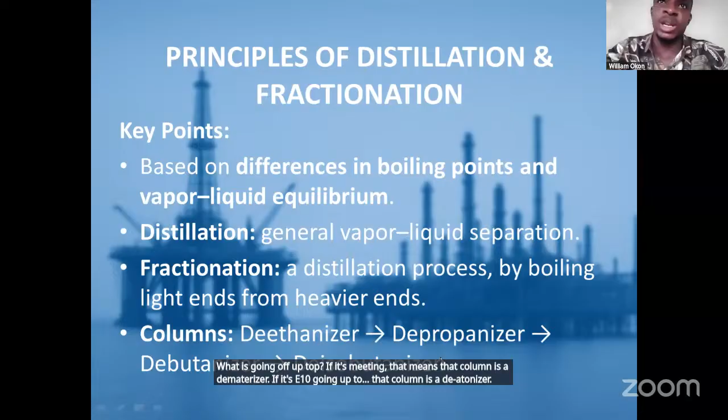Now, in fractionation, each fractionator is named for its overhead product. So if I am fractionating or distilling, separating a product, what is going off up top? If it's methane, that column is a demethanizer. If ethane is going up top, that column is a deethanizer. If propane is what is going up top, that column is a depropanizer. So it is named based on its overhead product.

So we're going to look at this simple process flow in NGL extraction. It starts with your gas preparation. NGL extraction processes have to start from feed gas preparation. So what does the feed gas preparation entail? It entails your gas treating and conditioning.

So if you look at my screen here, this is the gas treating and conditioning section I'm talking about. So when you talk about gas treating, what do we mean? Now, for a certain product, there is supposed to be a standard or specification for the allowable amounts of contaminants in your product. And this varies from one plant to another based on standards and customer requirements.

So what are we talking about? Let's say I am producing from a reservoir, I need to know my gas composition. I should know the amount of, say, ethane to propane ratio in my gas stream. I should also know, am I having sulfur in this gas stream? Am I producing sulfur as well? Is mercury part of this? How much water vapor content do I have in this gas stream? Now that would determine my gas treating and gas conditioning process.

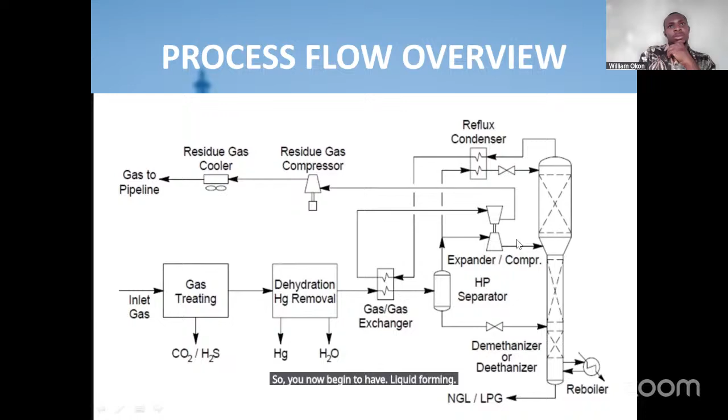Do you get up to that point? Yes, because it had been reduced to its dew point temperature. So what's dew point temperature? It's the temperature at which liquid begins to condense out of the gaseous phase, right?

So that's for the expander. This is a typical, let's call this your de-ethanizer. I'll be making reference to your de-ethanizer this time. So this is your typical de-ethanizer, which we'll be looking at as we go further. I wouldn't want to bore you with all of these processes right now because we are still keeping it really basic, but you would understand more as we progress.

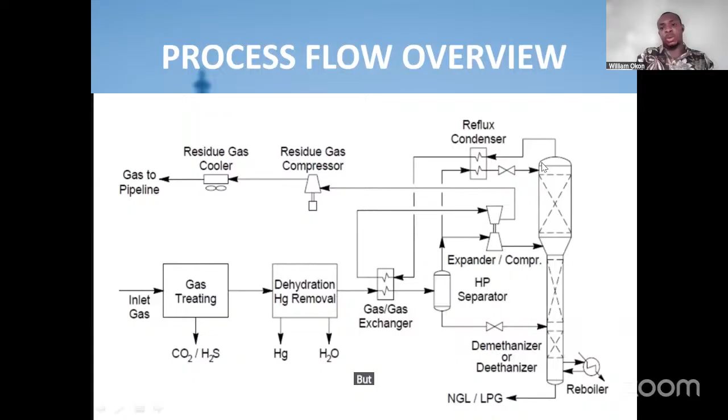This is a typical fractionation column. I want you to see what a fractionation column looks like. So this fractionation column, what are we really looking at? We've built up to this point. We are trying to remove one or more lighter components, fractions, from the major stream. We are removing lighter fractions from the major stream with a fractionator column.

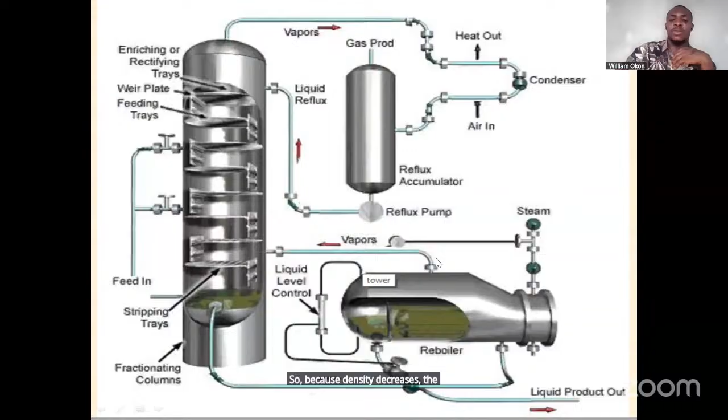And because there is a temperature differential that has been formed, your bottom product is able to flow to the reboiler whatever is going out by gravity due to that temperature gradient that is created. So the buoyant upward force becomes stronger when density reduces. Because density decreases, the buoyant upward force is enough to overcome the weight of the liquid, therefore pushing it upwards into your column. So it continuously flows and is a closed cycle.

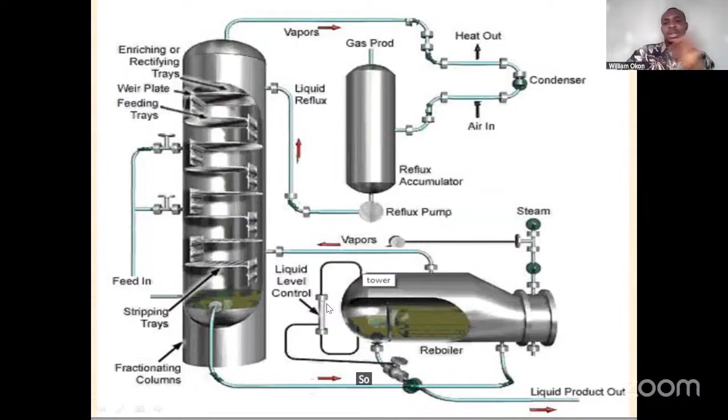So the level in this liquid is usually controlled by a level controller. That's for another day - we will dive into that as we go further.

So to achieve top product quality in NGL recovery, I felt it would be necessary for me to take you through what the Ortloff process is really all about. What is the Ortloff process?

It's the single column overhead recycle process, which is an advanced cryogenic distillation configuration developed by the Ortloff engineers. It's a patented technology. You could see, if you want to do a top design for NGL products quality, it gives very good designs.

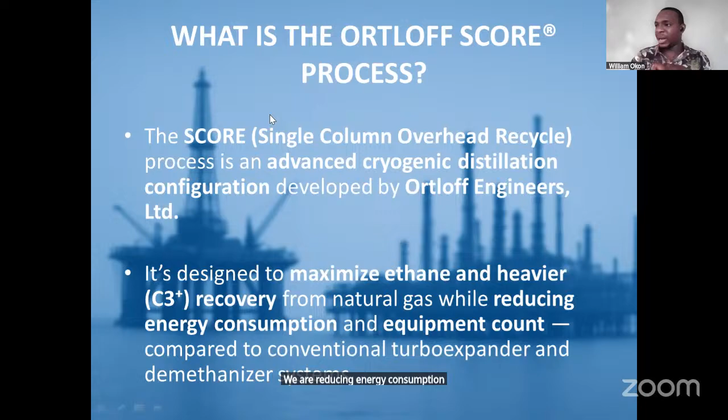Now, why did I introduce you to the Ortloff design process? It's because they maximize ethane and heavier hydrocarbons recovery from natural gas while reducing energy consumption and equipment count in the process. The Ortloff process encompasses energy optimization and also purity of the product. So in trying to conserve energy in a process, they also achieve product purity or product quality.

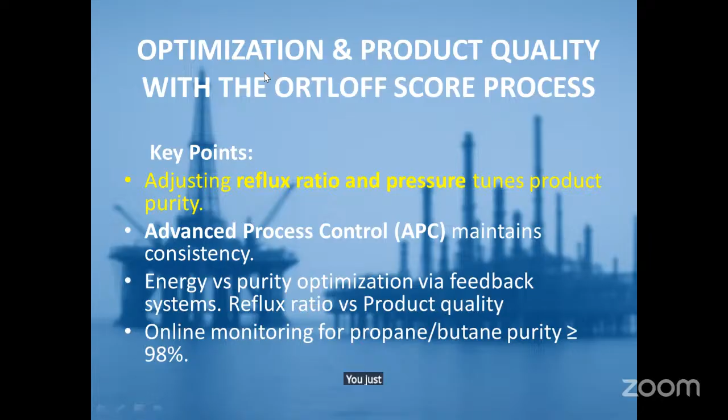You just introduced the Ortloff process as being a patent technology. Okay, sorry about it, thank you very much.

So the Ortloff process is more effective. Why? Because in energy conservation, it's also able to achieve product purity. This is done by controlling the reflux ratio. In controlling your reflux ratio and the pressure in your deethanizer column, you're able to tune your product purity. I'll explain this as we go further.

So what is another key thing about the Ortloff process? With the Ortloff process, for a deethanizer column, you're able to recover 98% of propane from that column, just leaving with 2.0 or less percent of ethane composition, which again, the design varies from plant to plant, depending on customer requirements and industry standards. So it has the ability to give you up to 98% product recovery, NGL product recovery.

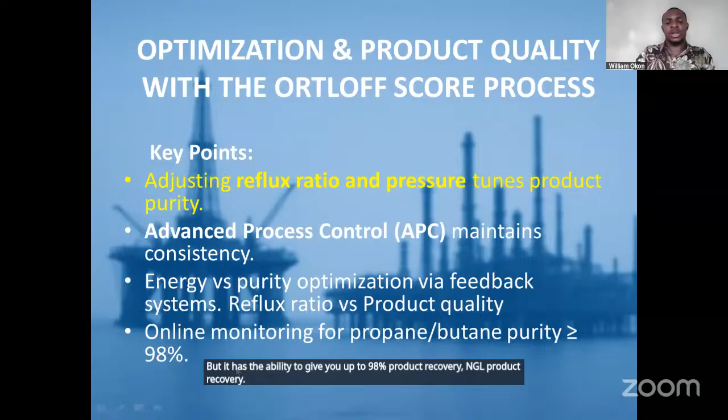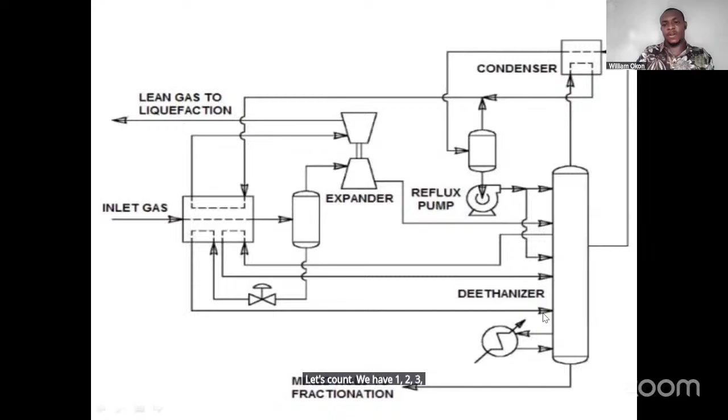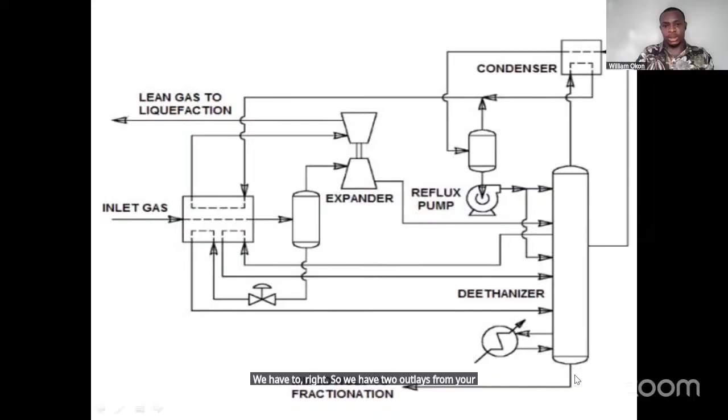So let's quickly look at this process. This is a typical Ortloff process. Now look at your column, you can see there are many inlets. Let's count: 1, 2, 3, 4, 5, and 6. Then we can also count the number of outlets from the column: we have 1, we have 2, right, so we have 2 outlets from your column, and 3, sorry, your bottoms NGLs is the third outlet.

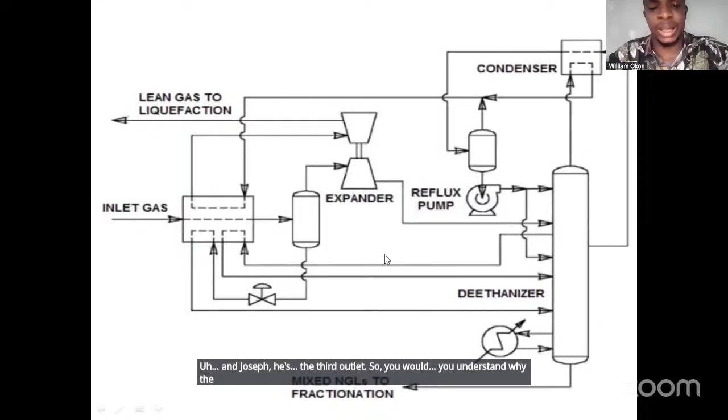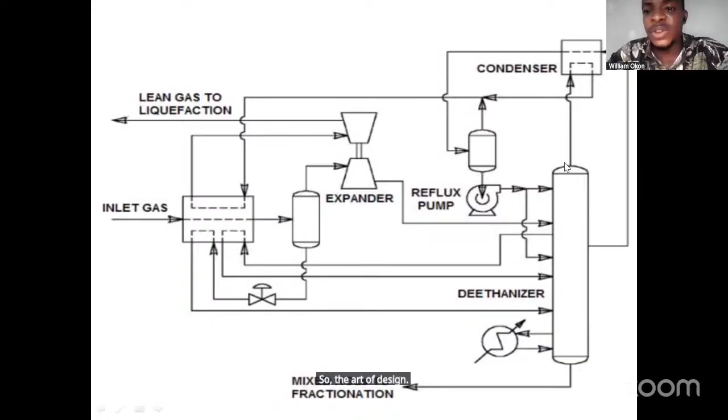So you understand why the Ortloff design is like this. I'm going to start from your inlet gas stream. Remember that your gas coming in is hotter, so there's supposed to be heat exchange. It's supposed to come in and be cooled in your inlet gas exchanger. So the Ortloff design gives you the ability to conserve energy. You use the cold feed to exchange heat with the hot feed, and that's a very flexible design.

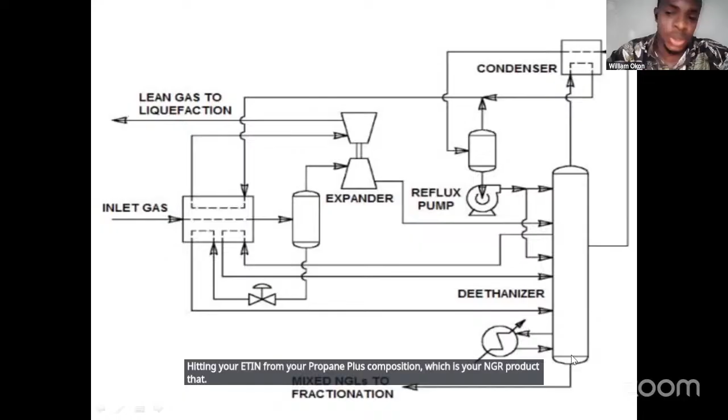So if you look at this, the reboiler has provided the heating, separating your ethane from your propane plus composition, which is your NGL product that you want to sell to your customer. So ethane is going up, right? This ethane going up is your overhead product in this de-ethanizer column.

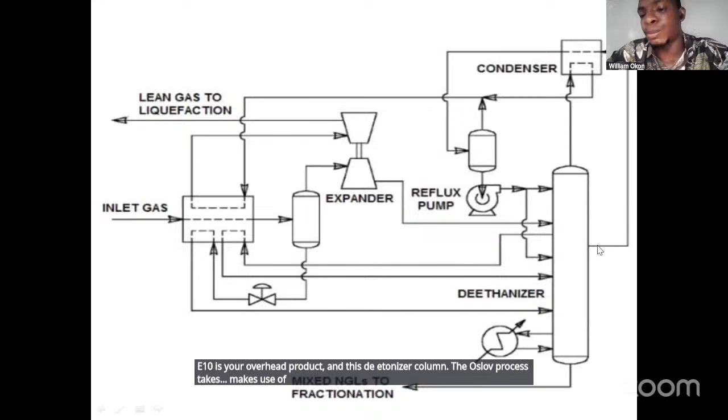The Ortloff process makes use of the side draw to get your reflux. So what is coming out here? Remember, temperature in a distillation column decreases from bottom to top, so it is hotter at the bottom and cooler up top. So once my feed comes in, it gets boiled off, the ethane goes out as the overhead product.

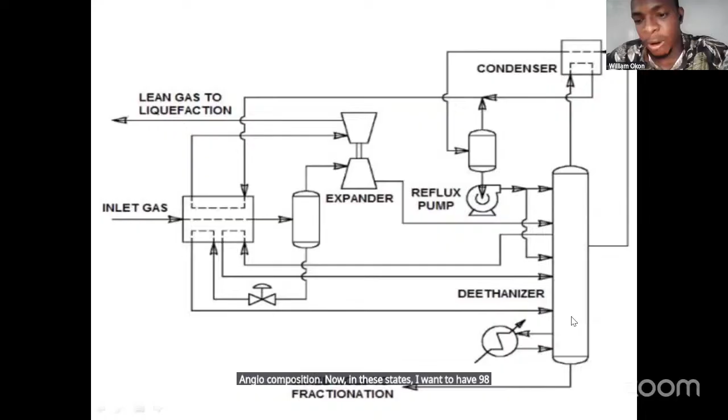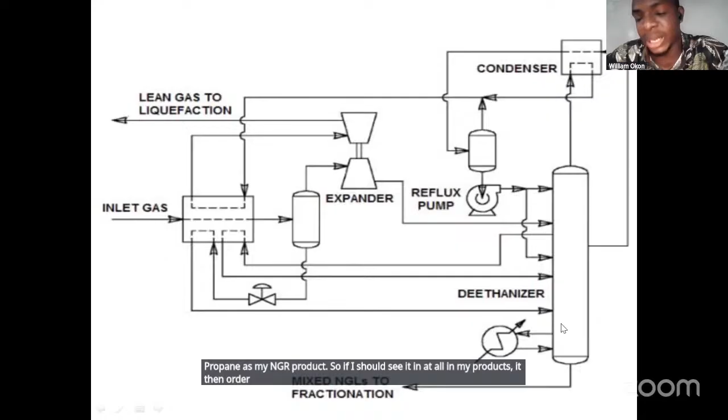What I'm supposed to be having flowing through as my bottoms product should be my propane plus NGL composition. Now in this state, I want to have 98% of propane as my NGL product. So if I should see ethane at all in my product, ethane or other lighter composition like methane, it should be only 2.0 or less percent in my 98% product. To achieve this using the Ortloff process, all these controls and conditions are put in place.

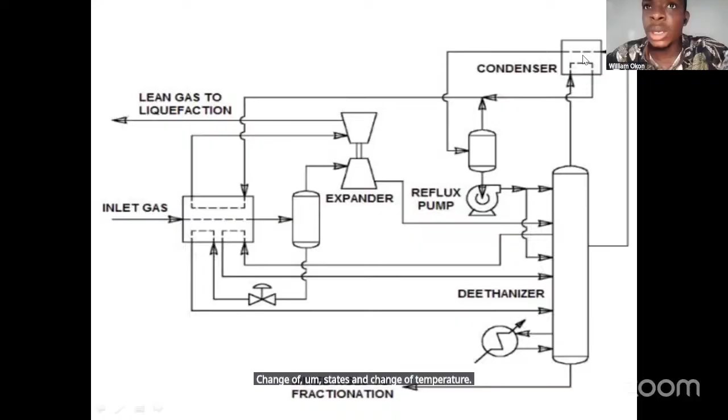My reflux side stream goes through my overhead condenser. In this overhead condenser, again, latent heat and sensible heat are being taken care of here - change of state and change of temperature. The overhead condenser's reflux side draw exchanges heat with your overhead product, then comes into your reflux accumulator.

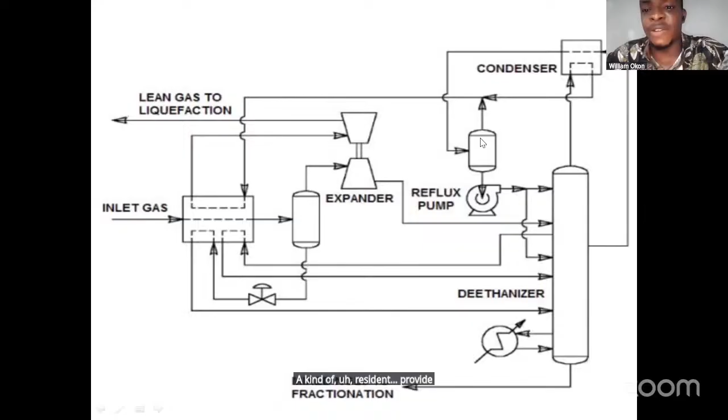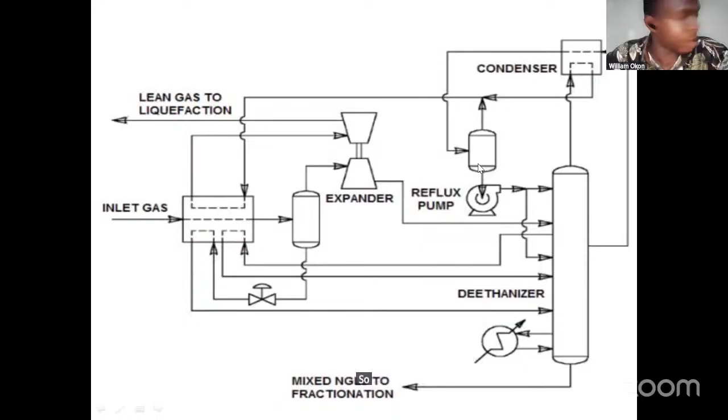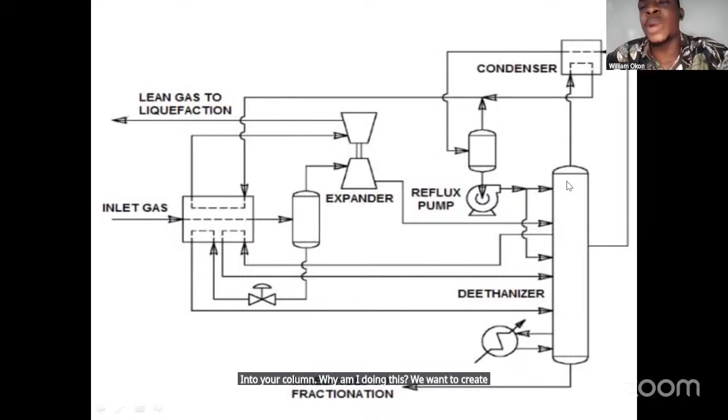The reflux accumulator provides a kind of residence time for vapor and liquid to be separated. We want vapor going up while the liquid goes to the bottom. So the liquid reflux will be pumped by this reflux pump into your column. Why am I doing this?

We want to create a countercurrent contact between rising vapors and falling liquid. So if my rising vapor has eaten this product so much that some propane is escaping with the lighter ends going out with the overhead product up top, with the help of this reflux, which is split into 2 streams, we give that countercurrent contact so the heavier composition in your lighter end can condense off and fall back to the bottom of the de-ethanizer.

So your reflux is being ratioed. One is fed to the top of your rectifying section, while the other is fed to the top of your stripping section. I don't know if anybody is following me. Please let me get reactions if you're following.

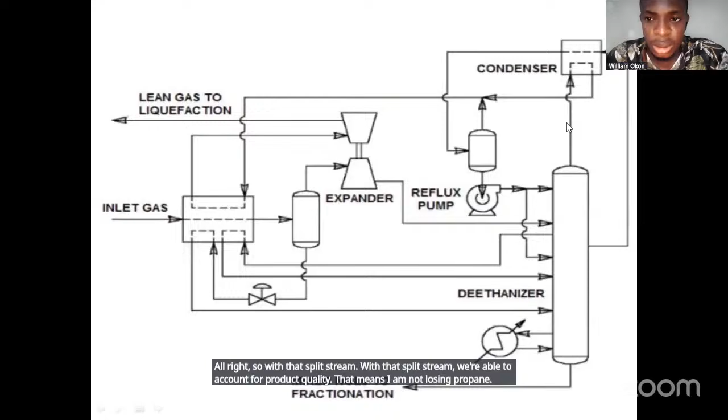All right. So with that split stream, we're able to account for product quality. That means I am not losing propane as my overhead product. I want my propane as much as possible. I want them going through the bottom, because that's what I'm selling.

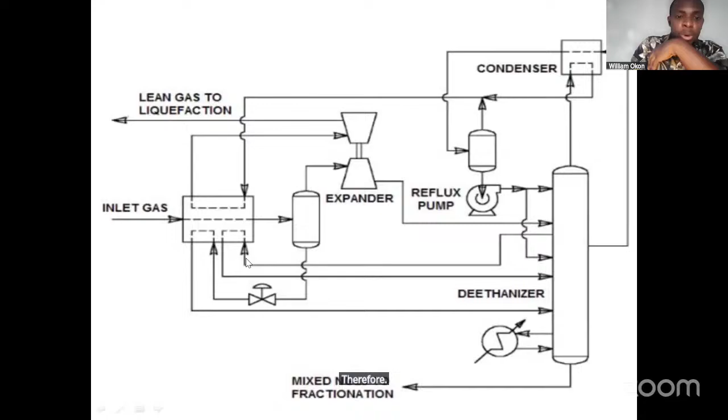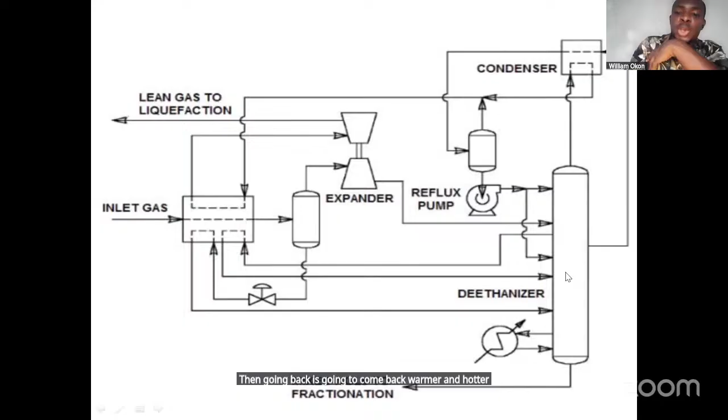Then there is provision for another side draw, again for heat exchange, energy conservation, and product quality. So the heat is exchanged. This other vapor is cooler. It exchanges heat with your inlet feed stream, then comes back warmer and hotter into your stripping section. Remember, the stripping section is heated so that we can drive off as much ethane as possible. We are trying to achieve product quality in this state.

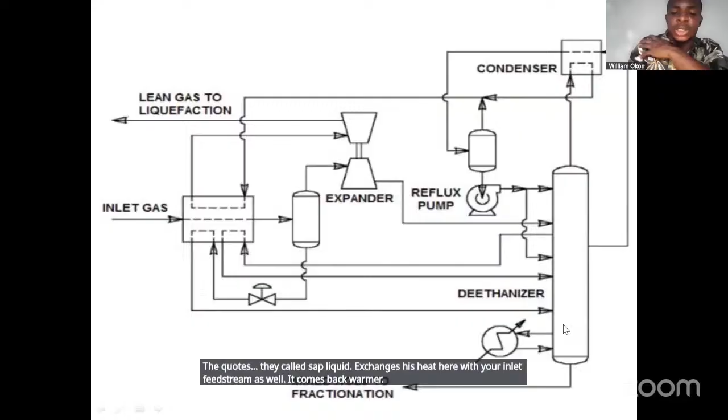Your liquid from your cold separator as well is exchanged. The cold sep liquid exchanges its heat here with your inlet feed stream as well. It comes back warmer into your stripping section so that we can boil off as much ethane from the propane plus composition.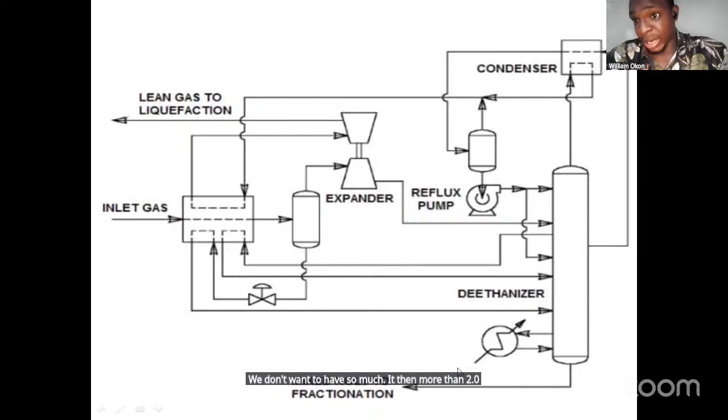Remember, we want to meet product specifications when looking at NGL extractions as well. So that's why there are many controls we put in place. If I am operating this unit, we make use of a chromatograph or analyzer to monitor the ethane to propane ratio in your de-ethanizer column. We don't want to have more than 2.0% ethane. That's the customer's requirement, right?

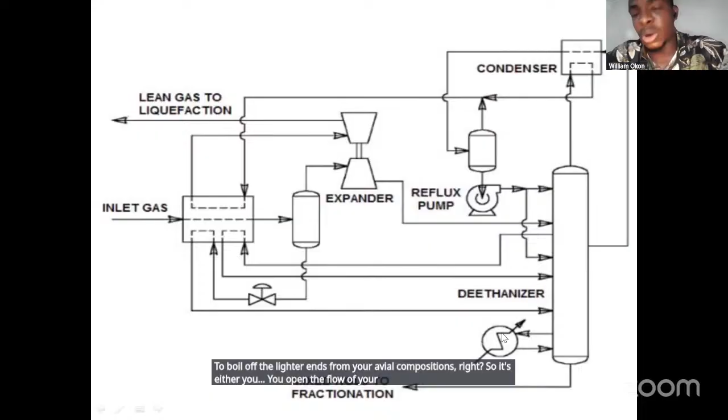So maybe the operator is operating and sees that there is more percent of ethane in the composition than required. What do you think will happen? They have to start playing around with temperature. We should heat up more. It may infer that the temperature is not enough to boil off the lighter ends from your composition, so you either open the flow of your heating medium more to heat up, to achieve the bottom temperature needed to strip off the vapor from the components.

And in a case where I begin to experience flooding, I have to begin to rationalize or regulate the amount of reflux again, and the feed stream, so that I don't flood my column.

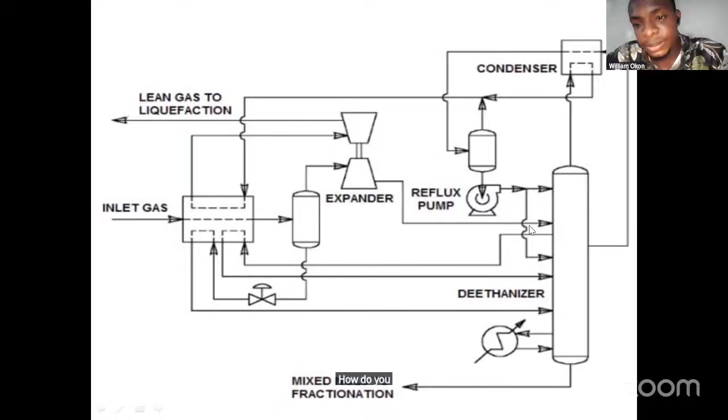In a case whereby your expander is not working, or you are starting up your plant and the expander right now is not running, how do you cool off the gas? There is what we call the Joule-Thomson effect. We make use of Joule-Thomson valves. The valve is provided to bypass this section, and with the aid of that valve, it provides adiabatic expansion.

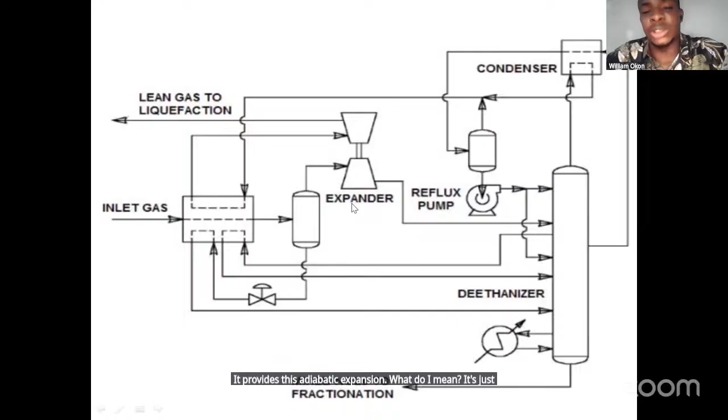What do I mean? It's just using basic Joule-Thomson effects. It's not taking energy from the gas to drive anything. So as the gas goes through those restrictions, pressure drops and temperature drops. The resultant effect is that your column will be operating at a much higher temperature and pressure condition compared to when you were operating with an expander.

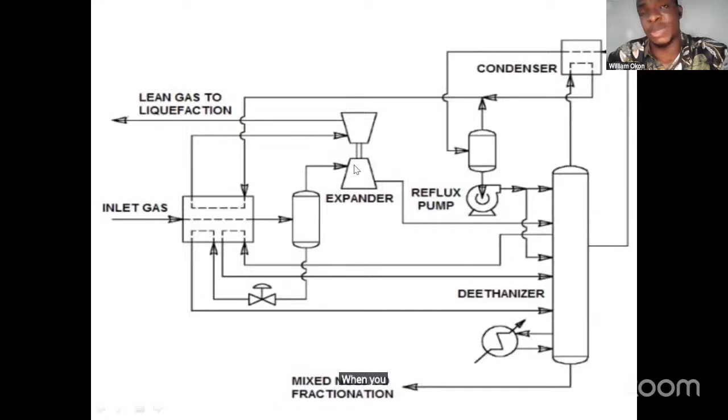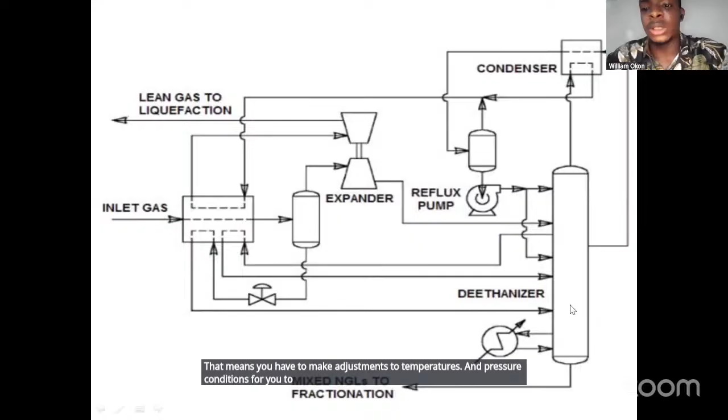So with that being said, you have to make adjustments to temperature and pressure conditions to boil off just the necessary ethane components and recover as much propane plus components. But using a JT valve, your product's quality may reduce to as much as 60% propane recovery because of the higher temperature and pressure conditions.

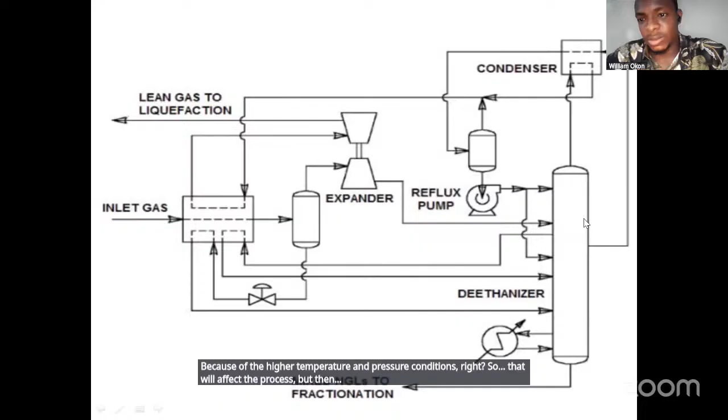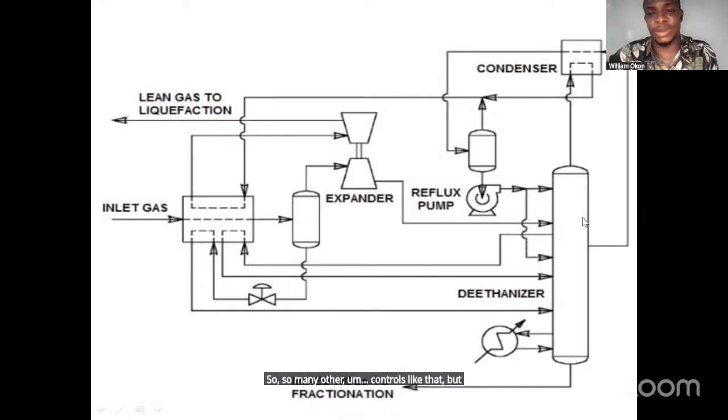So that will affect the process, but that's just for the time being until your expander is brought back in service. There are many other controls like that, but we don't have so much time to talk about them now. Maybe we'll have a next series that could do justice to that.

So your NGL extraction enhances gas value. Distillation and fractionation ensures separation precision. Then process control ensures product quality and energy efficiency. So with this, we've come to the end of this session. Thank you very much for your time, and I hope I've been able to impact.

Yes, yes, yes, a wonderful presentation. That was a wonderful ambassador lecture by our very own engineer William Okon. We can't thank you enough. A virtual round of applause to him. It was indeed a thrilling, exciting, and insightful session. We can't appreciate you enough for this wonderful presentation.